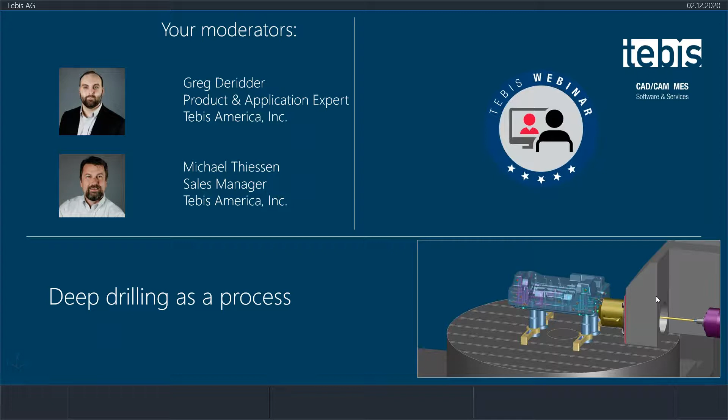A little bit about the history of Tebis. For some of you that know Tebis quite well, you know this history. For some of you that are fairly new with Tebis, this is potentially a new experience. Tebis has been around since 1984, founded by Mr. Bernhard Rindfleisch and Mr. Hahn.

And I'm proud to say that this year marks our 25th year anniversary here in the US. We started in 1996 by Mr. Gerardo Miller here in the United States, and ever since we've been operating out of our Troy location. As you see, all the way through our current state, the last milestone shown is 2018, but trust me, there were many more milestones between 2018 and today.

Just to give you an idea, Tebis is not just a German company based out of our German headquarters with all of its subsidiaries. Tebis is a worldwide company. We deal mainly with our sister companies, our subsidiaries here in the US at Tebis America, as well as our friends at Tebis UK, Tebis Scandinavia, and so forth.

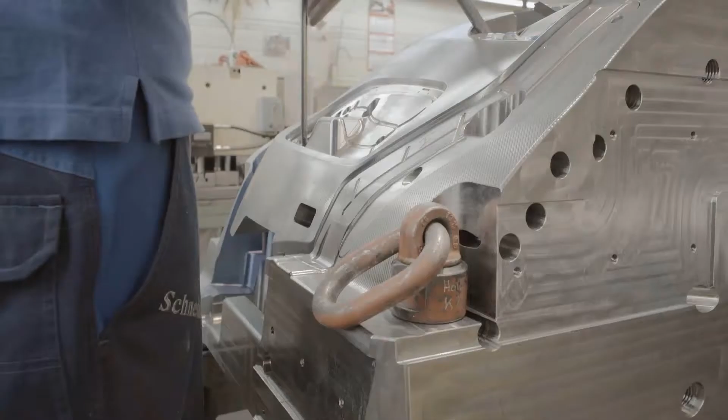The various different sectors that we are in: of course, we're in the mold and die, that's what we're mainly known for, but also in the aerospace industry, in the mold making industry, as I've already said, as well as the medical industry. Just to give you a little bit of an idea of where we're all involved, it is also electrode creation. And in this particular webinar, of course, we're dealing with deep hole drilling or gun drilling applications, which of course is majorly involved in the mold environment, but also in the die environment with hot forming dies and so forth, where you have to put coolant lines inside the molds.

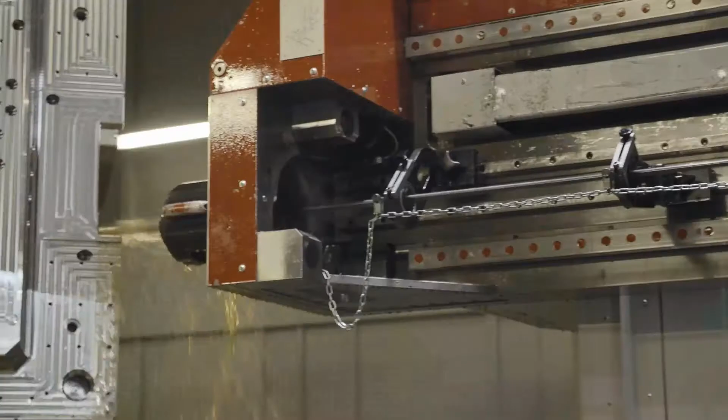So just to give you that, all the Tebis programs that we can create come directly out of our software that we develop inside of our system. And this deep hole drilling is no different than any of the other modules that we have. It is developed in our own house near Munich, Germany.

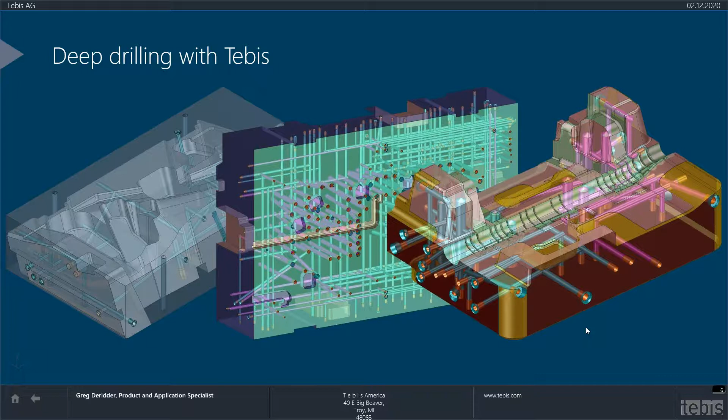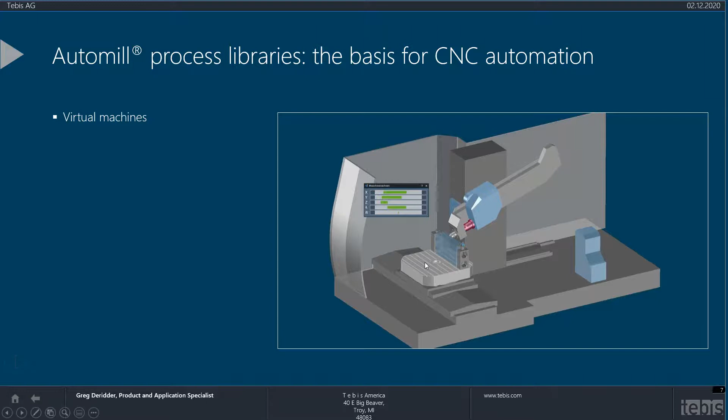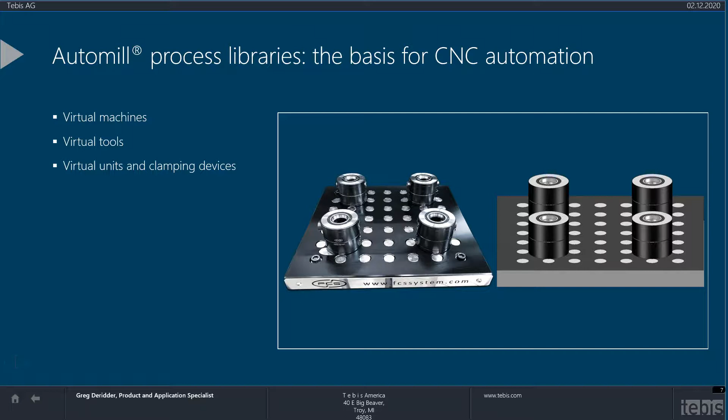All right. So Tebis is going to utilize Automill here to create different items for not only automation, but different standardized processes, such as digital twins, such as virtual machines. We can also implement the virtual tooling here, so we can collision check the full tool, the cutter, the shank and the holder, all the way to the head of the machine, as well as the limits. We also have virtual units, such as clamping devices, FCS, risers. We can draw those in the software, and you're able to fully set up your part very, very easily.

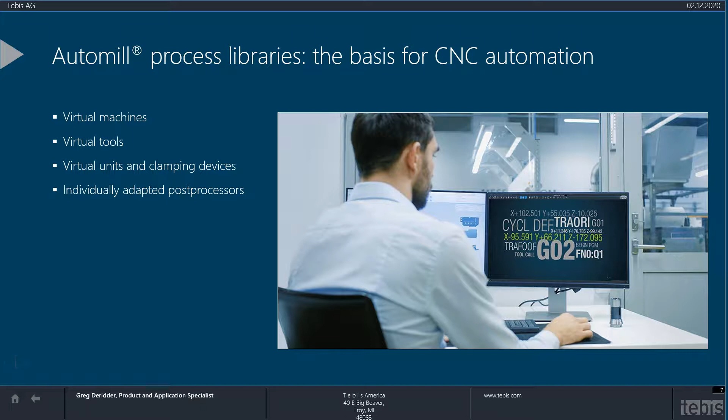We have customized post processors that we're going to create, so we can handle any sort of controller, most controllers that are out there for different styles of machines. So maybe your machine doesn't have a standard controller, but that's no problem here for us.

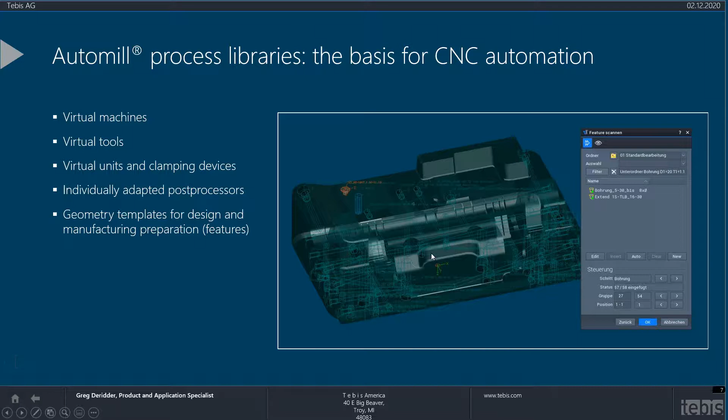We also work off a very templated system. So different items, what we're going to call features here. Features essentially are going to stretch over the part to any sort of water line that might be here, water lines, ejection lines, vent holes, things like that. And we're going to make these variable so they can fit a wide variety of different sizes. And then this is going to hold the smarts, to where if it sees a little hole like this, it's going to see a spot face. It's going to see maybe it needs to put in a spot drill, maybe a drill, maybe if it's longer, it'll put in a gun drill.

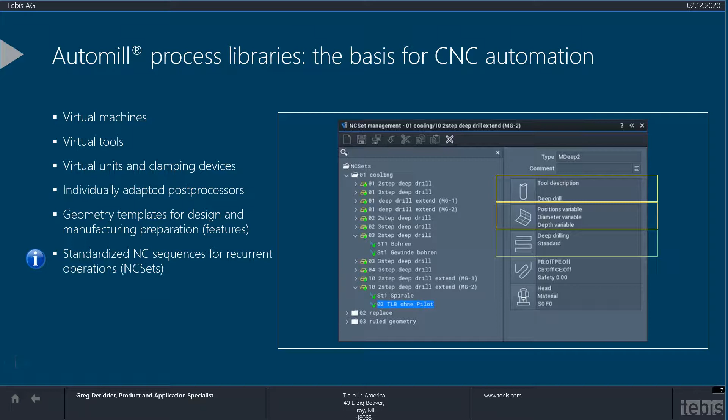We're going to do this with what we call an NC set. What an NC set is going to be is a grouping of tool paths that we create ahead of time that's going to take a look at the feature, and they're going to be connected. So now if I run a feature, it'll actually run an NC set in the background, and this is going to hold a lot of your variables, to where maybe I want to switch over a machine and I want to switch the process a little bit. Maybe the strategy changes, the tooling might change, different holders, things of that nature.

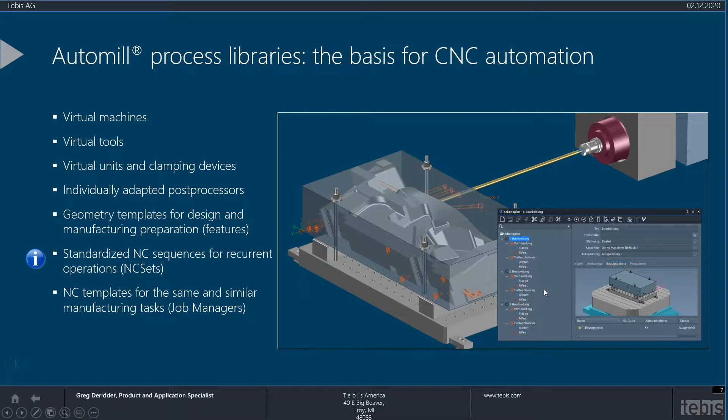And then we have NC templates for similar machining tasks. So essentially what this is saying is I'll bring in a templated file here that's going to allow me to maybe pick a different head. It's going to run a different feature automated program here, or maybe I want to run specific static tools in here. I could even put in there as well, but we're going to focus a little more on the automation side of things. So I want to go back here and discuss one more thing here.

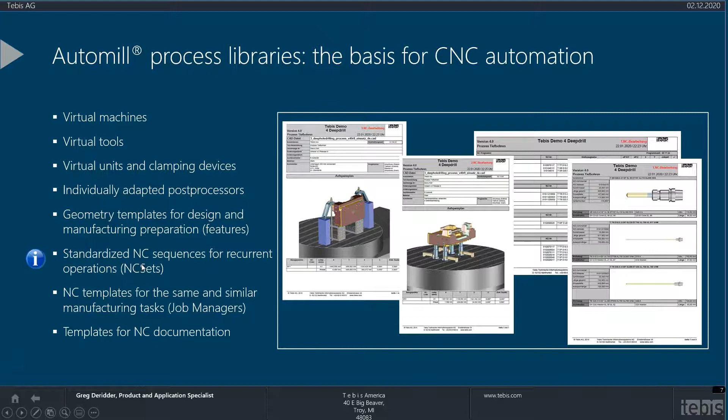So I'm going to go back here. We're going to discuss these NC sets just a little bit further before we really get started. So exactly what is an NC set? As I've said before, it's more of a grouping of tool paths that we create ahead of time that we can use in the future, and then I can keep using them. So the whole point of this is to standardize your process. You don't want to be repeating yourself, programming the same thing over and over again. So if I create these NC sets ahead of time, then I'm able to standardize my process a little more.

We can make as many of these as we need to. But this is what it's going to look like. Right here is a library for it. All right. And the first thing it's going to ask for is for your tooling. So we're looking at a variable tool description. What that's going to do is it's going to search your tool library. It's going to look for the right tool.

Okay. It's going to look for the right size tool as well, which is going to help optimize what I'm using. It's going to make sure that the tool's not too short, but it's also not going to grab the longest guy in the drawer there. It's going to make sure that it optimizes it and grabs something that will fit, but that's also optimal for you to run. It's also going to look at the different entities here.

So talking about the features a little bit, which I'll get more into, this is actually going to stretch across your features here, where you're going to see the different shape, if it's a through hole or if it stops. It's going to look at the diameters, it's going to look at the depths, and I'll get a little further into this depth table too, of how simple this really can be. Basically, you're letting the features do all of the work for you. Once you automate those features in, then you're pretty much there.

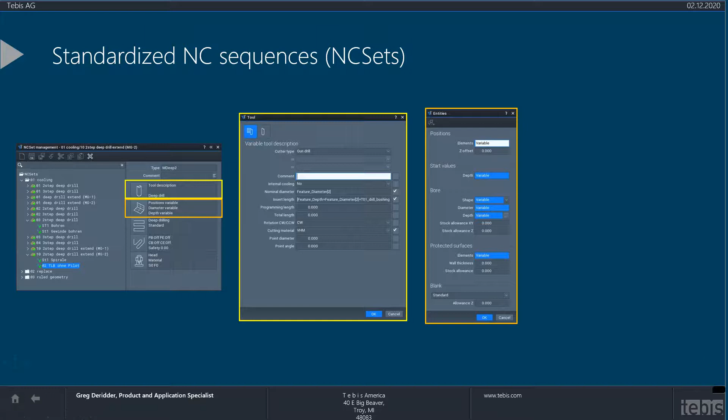It's really, really simple. So if I look at that depth table, it's going to show me the material area, the gap area, things like that. Then I can really easily just kind of go back and switch it if I need to. And then this is going to be your strategy panel, where you can go in and you can really fine tune what you want to do here. Maybe you want to adjust how it starts from the very beginning. Maybe you want to change how it's looking at those cut sections.

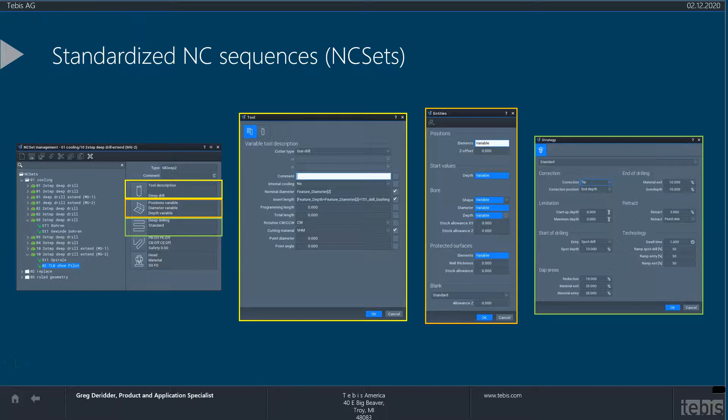So a cut section is more or less going to be a water line for a mold. And that water line is going to be passing through another water line that was already previously drilled. So as it passes through, some of you guys maybe know or you don't know, you need to speed up and slow down that drill, right? A certain amount. Maybe you want to put a ramp in there, ramp the speeds and feeds down, or maybe you just want to ramp the feed down. It really just depends, but we can really fine tune that here, which is really nice.

All right, so let's just talk about some of the configuration settings that we have here and how easy it is to use, right? This is, like I said, more of a set it and forget it. You're creating something in the beginning to use till the end of time, right?

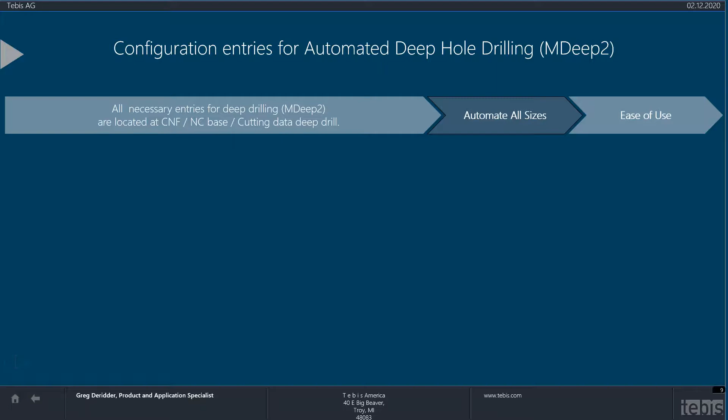You're creating something that is, okay, this machine maybe is set up a certain way, but I don't really want to run it this way on this other machine, so I'm going to set up a different configuration setting. So just to kind of look here, we got our configuration. This was actually added recently with our latest update for gun drilling water lines and such inside of Tebis. But you're able to really fine tune everything in here.

So you can have different machine setups for different operations, different materials, and you can get very exact, which is something that we were looking to do here. So if you want to, you could say, I have this gun drill. It's maybe an inserted tip, or this one's a conventional style gun drill. I want to run it, let's say, 2,000 at 6 inches a minute. But then when I slow down, I want to slow the speed and feed down, maybe to 1,000 spindle speed, and then maybe like 2 inches a minute.

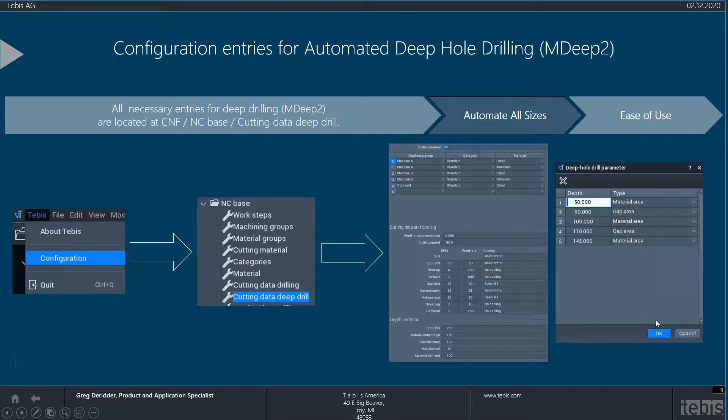And you could do that for that gun drill, but then you could also insert another value for another one. And then this is that depth table I was talking a little bit about, where it'll give you the exact depths based on those feature cut sections, which I'll get into. It'll say, at 50 millimeters deep, that's all material, but at 60 millimeters deep, there's a gap there. But really, you could just go through and switch it back and forth. So even if there's not really a line there and I don't want it to slow down, you can just switch it. It's really, really easy.

All right, so just a little bit of a tip and trick section here. With my experience working with these different style machines, we worked with IMSA, Taurus gun drills, we worked with Jetto gun drills, things like that. And for the categories of work steps, it all really kind of comes down to the same bona fide items here. And the first thing I'm going to talk about is a work step. What is it really? You see two of them here that I created: deep hole drilling and preparation.

This is more or less if you have gun drills and boring mills inside of the same shop, and maybe you want to run a gun drill a little bit differently on a gun drill than a boring mill. So on a boring mill, you could set everything up in one automated process and kind of standardize everything. And you can run a preparation set, which maybe will only run your 2D, and then you can run a deep hole drilling set, and that's only going to run your gun drills. So like I said, just a little bit of a tip and trick here if this is something you're interested in.

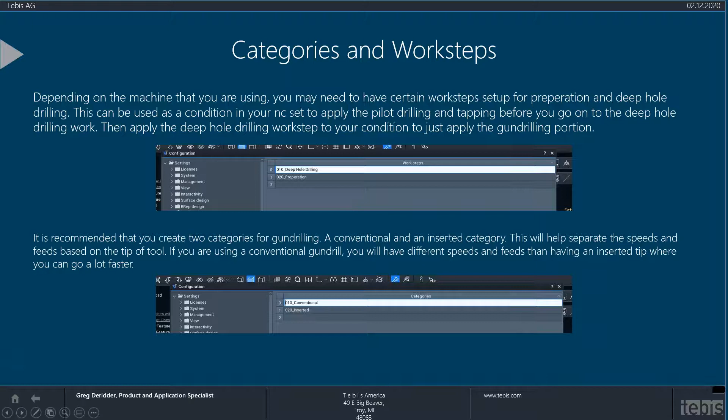And then this right here is going to be the categories that I would typically recommend. Most of the time, if I'm going to a shop, I'm going to see guys using both styles of gun drills. Some guys are going to use inserted gun drills. Some guys are going to use conventional. So typically, I'll make a category for each, for conventional style and inserted. This is just going to help separate my speeds and feeds very nicely and make everything a little bit easier to use.

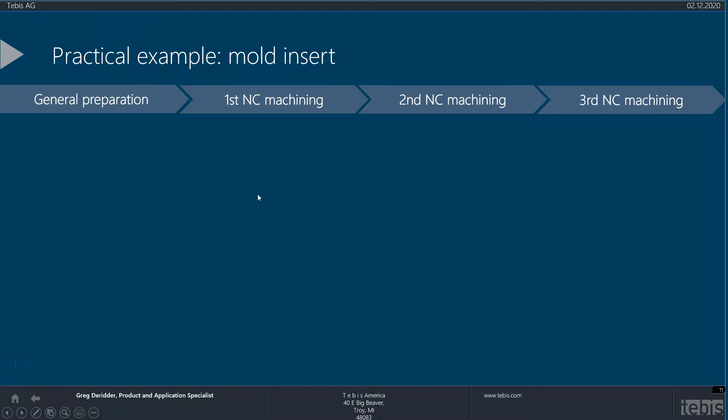All right, so now we're going to start talking more of a practical example here. So you got a couple items like your general preparation, your first NC machining, second NC machining, third NC machining. So it's just really the process. So what's the first step? I open up a job, it's been designed, it gets sent to me. What's step number one? Step number one is going to be the generation of features. I need to create all the features.

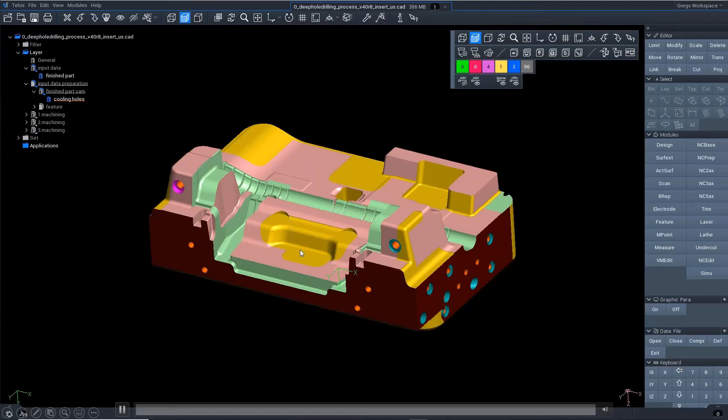So for some of you that haven't really worked with a feature before, really that's just going to be an overlay of the water lines. For right now, we'll just talk about the water lines, but it's an overlay of the water lines that are there. So it's going to have all the parametrics there. It's going to point to all the correct tool paths. It's going to pull all the necessary data that I need. So let's see it here. And as you can see here, this is just going to be this mold insert that I'm going to be working with.

And first thing I need to do is do a little bit of prep work. So I'll actually show you how to do this really quickly. You can use a top remove function, which is our function to actually separate the topology a little bit. Very, very useful. And for right now, I'm just going to go based off of the colors.

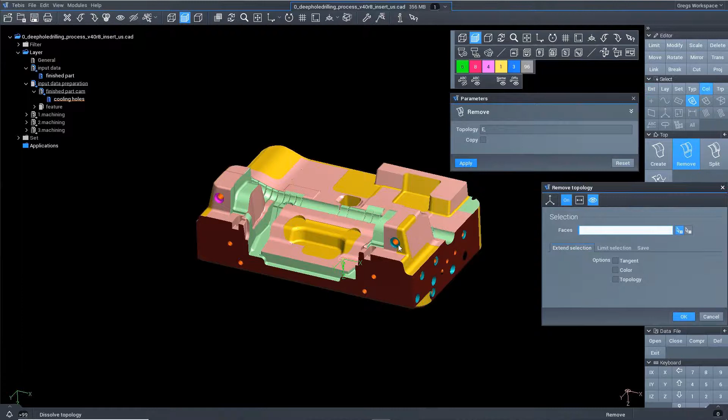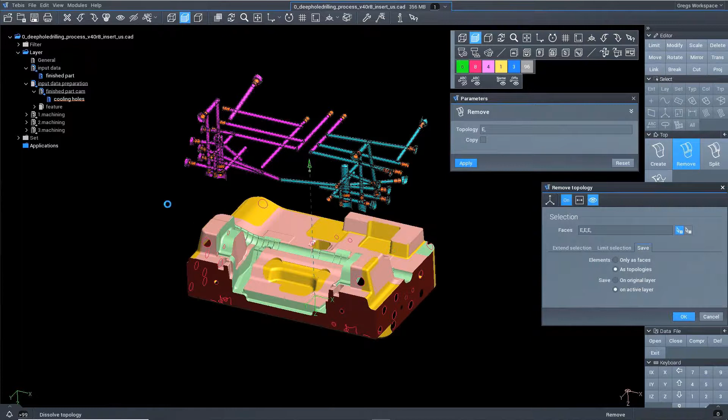If you're not using colors, there are other items that you can use, like tangencies and whatnot. But I'm just going to pick the colors here. And then I can actually separate very easily the water lines from the part itself. Not something that you necessarily have to do, but very highly suggested, because now it's going to make the whole process much easier, and you're not looking at the whole block wondering if you got everything or not. So just to help simplify it a little bit.

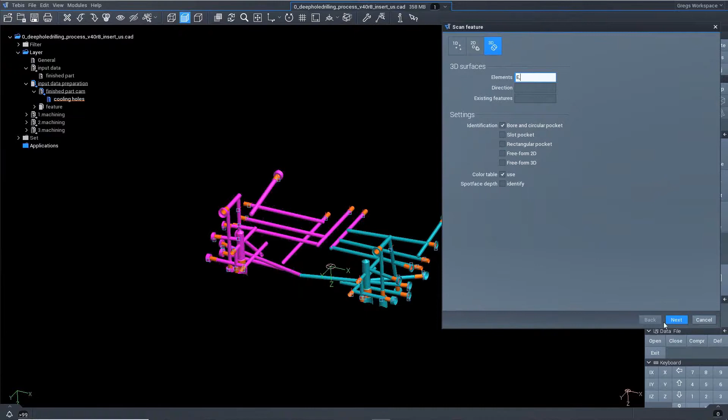We have another option here for extending. So typically what this is, which I find to be really cool personally, I wish I would have had this back when I was programming for the Gundrills. But what it is essentially, if your block is a little bit bigger than the part itself, maybe you went and you picked up a raw block and you need to put some spot faces on there so that Gundrill seats off properly. We can make this really simple.

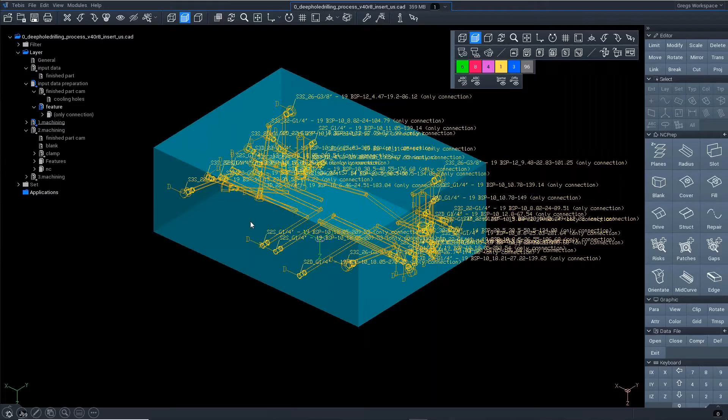So essentially, if you take a look here, the stock model is actually a little bit bigger than these features. It's a little bit longer. So obviously the starting point of the feature would be here, so you can't run it down into the block, right? You'll crash it. So I'll pick the stock model and then I'll actually scan all the features.

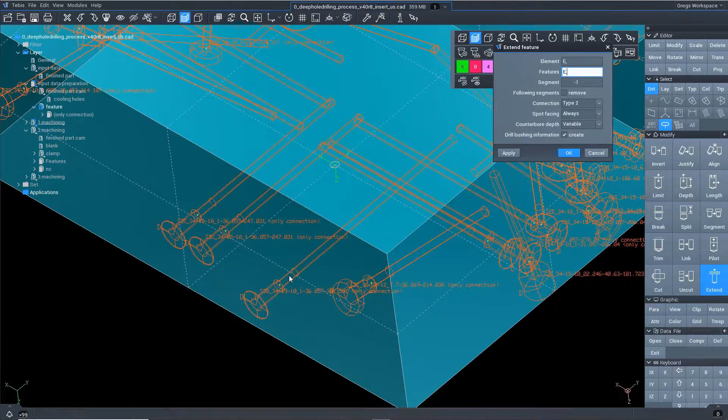And you can set up different types. But as you can see, it's going to automatically pull those features right out to the edge of the block here and then insert a spot face as necessary. It'll also insert a little counter bore too, which is kind of cool. If you got like a tap extension or something, that way it fits nicely in there.

All right, so now I made sure I got all the right features. Maybe, like I said, I have a raw block, or maybe I do have a finished block and I don't need to worry about that. It just really depends. So the next step is going to be, how do I want to sort this? I really do think organization is key, guys. You start working with a very complicated block. If you don't organize it in the beginning, it could always be a little bit of a nuisance here.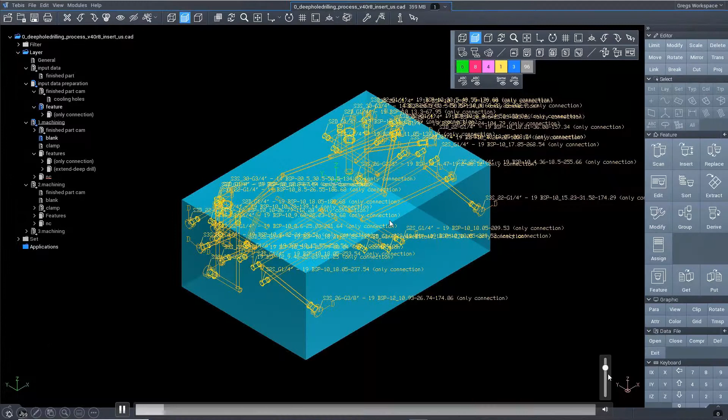So if I take a look, Tebis has a great sorting option, right? And I could put it on a certain layer, and it'll automatically sort everything per direction. So I can see what's coming from the top of block, what's coming from the side of block. Maybe I want to be a little more specific. Really simple. All right, so I created a feature. Maybe I got a raw block or something. I need to add a couple spot faces. I can do that really easily here and then sort it up. So really, this process is super quick.

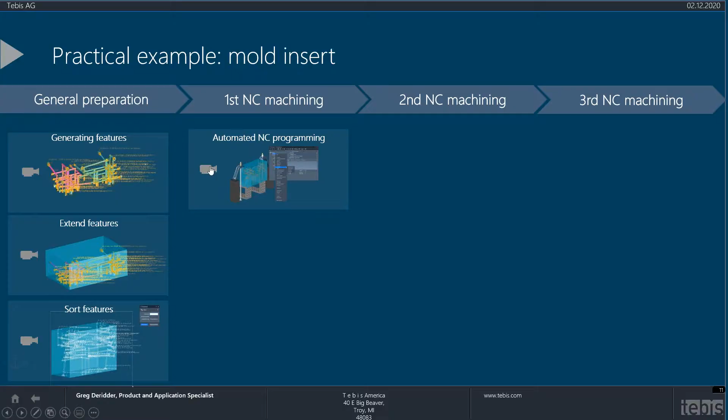So the next step is going to be to program it, right? Maybe I want to run like a template, maybe just for the backup block. This is going to be if you're not utilizing our cut and group section. So if I click this, you can see that I'm just going to quickly import a TXF file here.

Some of you maybe have been using templates for a little while now, so you might understand this, but realistically, what I'm trying to do is just standardize the process. I don't want to have something programmed manually every single time. I don't want to repeat myself.

So I'm going to go back in. I'm going to make sure I've got the correct pickup on the block here. Once I got the correct pickup, it already has all the toolpaths in there. And then I'm just going to kick this off. So once I kick it off, it's going to run everything that's needed. Maybe it'll skip some things that it doesn't need to, which is also kind of nice.

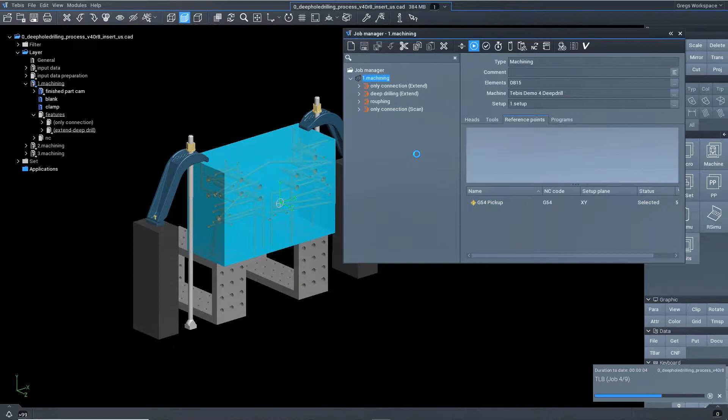Maybe it doesn't need to do everything, but my goal here is really just to maybe do a little bit of machining. Like as you can see here, it'll do a little bit of maybe rough on the back of the block if it needs to. And then it'll go through and it'll gun drill the water line. So you can see right here, this is going to drill everything as necessary.

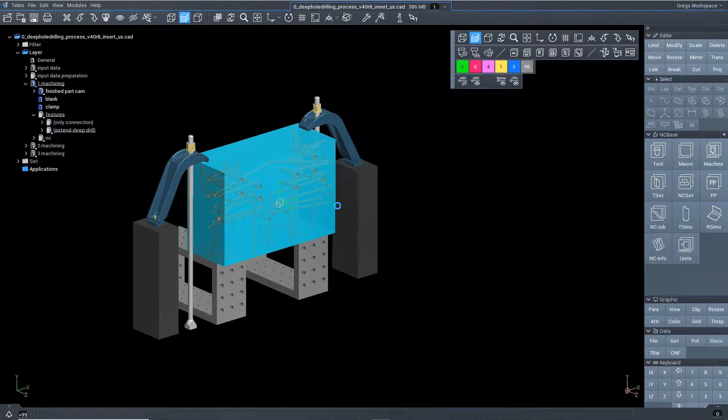So within no time at all, I was able to go through, create features, extend them, do what I need to do, and then I could create toolpaths. I could kick the machine off pretty quickly, and I didn't really have to look at any tooling. I didn't have to go through and adjust any parameters. All that stuff is set based off our feature and NC set system.

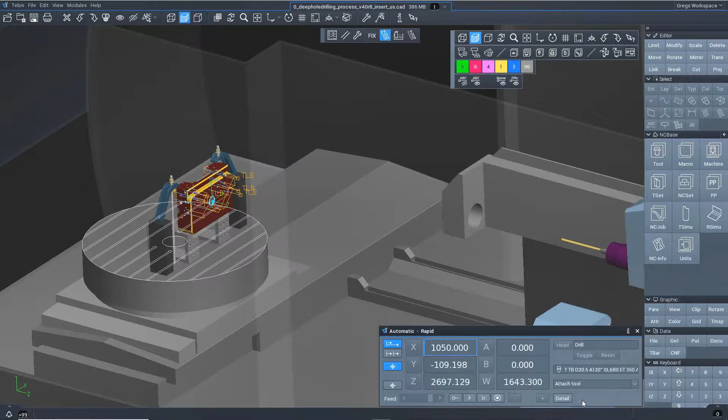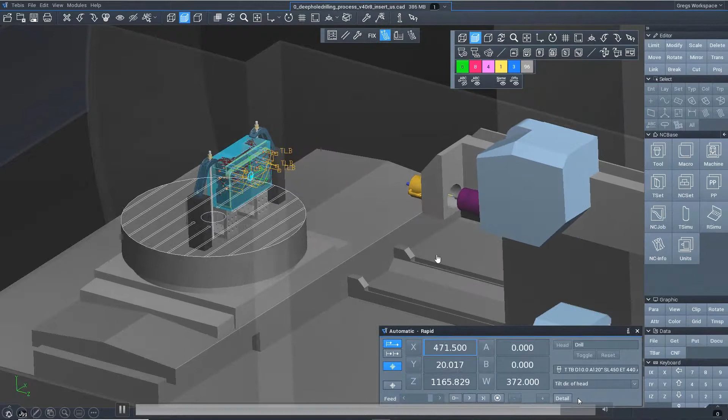So you can see here, it's automatically going to load the correct bushing. It's going to load the gun drills, and then I'm going to drill everything that's needed here. We kind of skip through this a little bit. You can actually see if it has to, too. This is just the straight work, but then maybe it goes through and does a little bit of a tilt. So this gun drill just has one head, right?

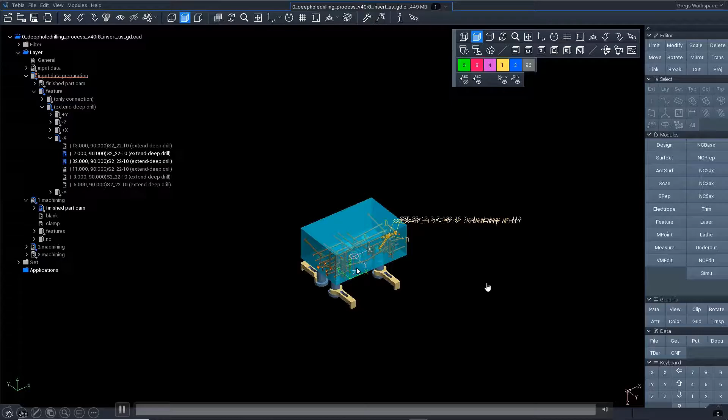All right, so what happens if you get a block and you're really not sure what bushing to use, or maybe you just want to test a couple things out here. We have this option here for planning. So if you look here, this is an angled spot face. Maybe I just want to get an idea of what I'm doing, what I'm using.

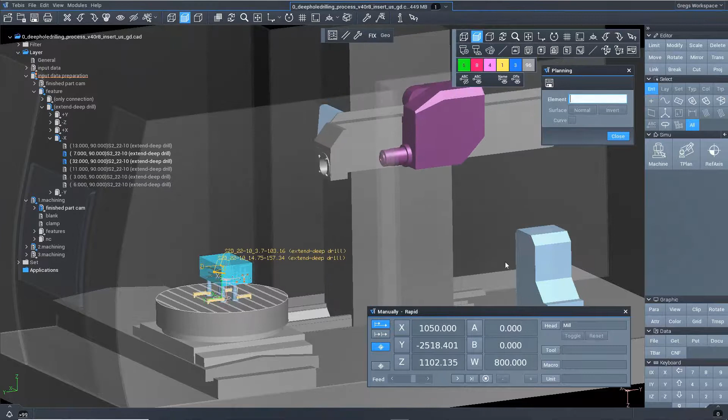Maybe I got a couple different bushings. I know some shops will have a whole drawer, right? Maybe if they go on the lathe, they create different size bushings. Maybe they create different extensions. So that's really what this is for. I'm going to pull in the tool. I got the gun drill head loaded. So just grab sort of a longer tool if I can, something decent.

And then you want to make sure you pick what's called a unit. The unit is going to be all your different bushings. This is something that you can add to the virtual machine. So I'll just pick a short guy here to start. And then you can adjust everything else as necessary. So you can see I could draw the drill back. I can move it around as needed. I can get some good numbers right away.

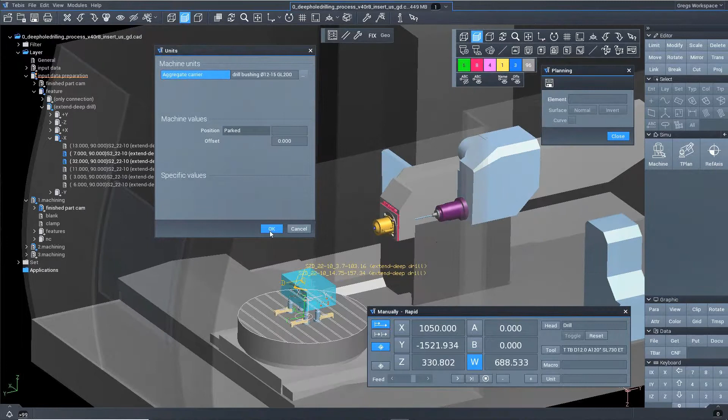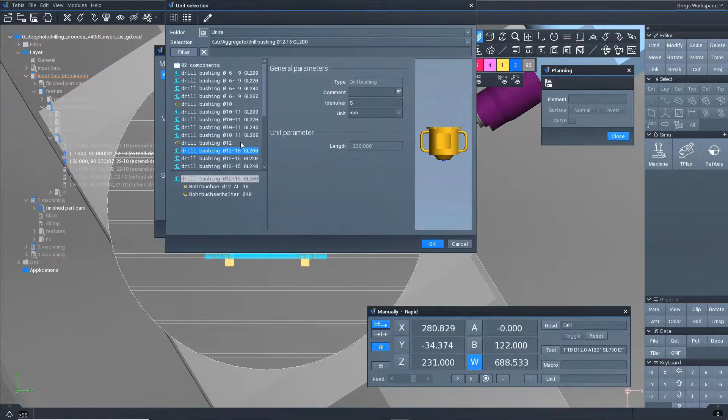And then what's pretty cool about this is now that I'm utilizing our feature technology, I can actually pick that feature right away and it'll jump to it. So as you can see, if I jump to that, my bushing's going to crash, right? So that one's no good. I can't use that. So I can go back to my units, and then I can readjust. And I could pick a little bit of a longer bushing here.

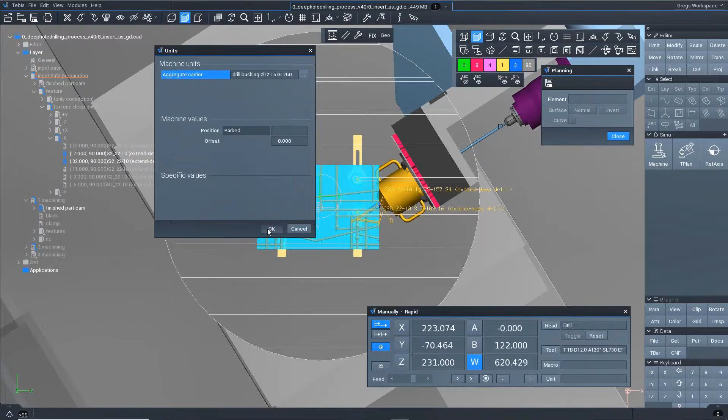You can actually draw the gun drill back into the block a little bit too, just if you want to see if it's going to air out on your length, possibly with that longer bushing, which is really nice. Just reselect your feature, and then you can see I've got the clearance necessary. So now I know for this instance, that's going to be the bushing that I want to use.

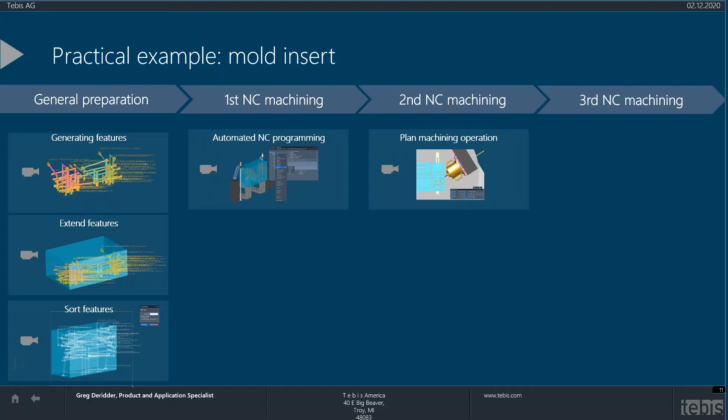All right, so let's get into cutting and grouping the features. So if I'm going to be working with more of a user-based sequence here, which is really nice with Tebis, I can actually sort my features and I can cut them. Some machines don't have this functionality, so we need to do it in the software. And you can figure out what side you want to machine first.

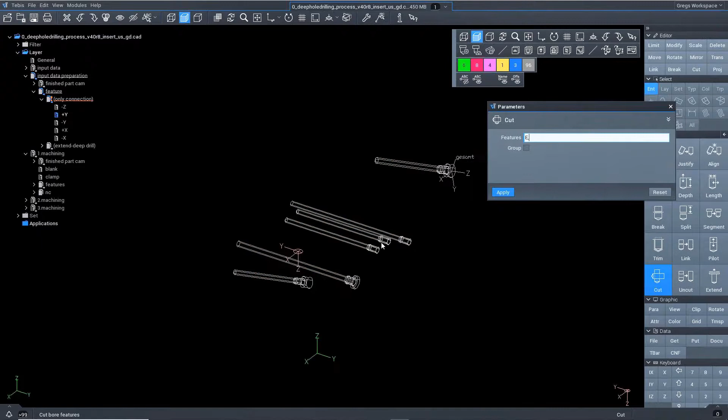I could pick that side of features. Like I say, this will be my second side I want to machine, and this is my third. And as you can see, it's now going to add those cut sections to the feature.

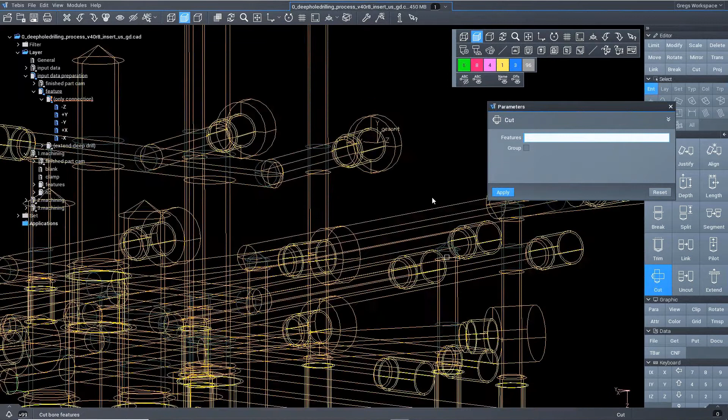So those cut sections in Tebis are going to be called a gap. As you can see right here, that's where the gun drill is going to speed up and slow down. You're giving it a user-based sequence to say, hey, when I cut this side first, this side second, this side third, this side fourth, I want Tebis to know that it's already done. I want to go through, speed up, slow down the gun drill properly, and I don't want anything missed. So at this point, if you'd like to, you could just group everything together.

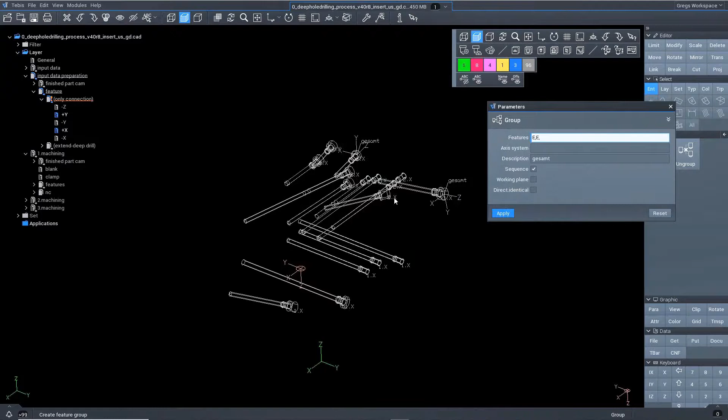Maybe you have a rotary table on your machine, and if you do this, it's just one selection. You just pick it and go, and you just run your program, so it'll run all the cut sections correctly.

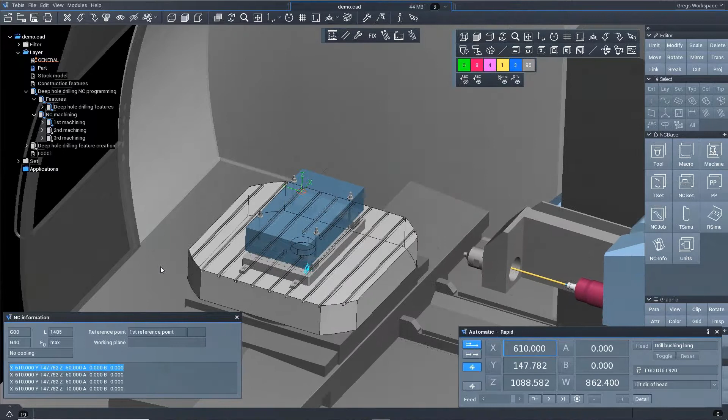What's really nice about this too in Tebis is if you don't like the way this was cut, or you're not happy with it, you could always go back and say uncut, then recut it. What I mean by that is not like cut a job, but more or less create those gap sections again, and maybe eliminate what's there if you want to start over a little bit. But as you can see here, now this is more of an automated process where it's going to go through and machine those features that are there.

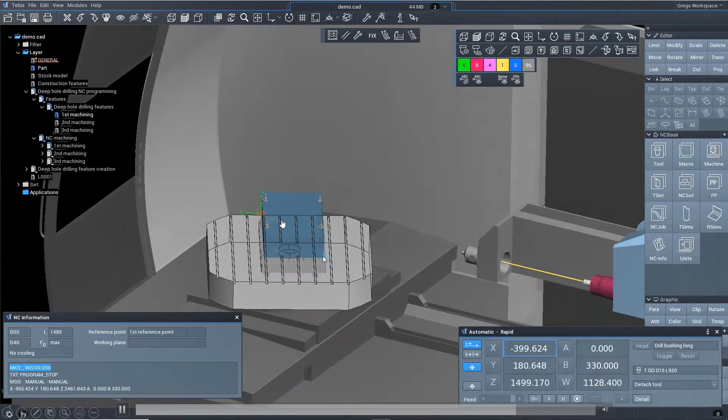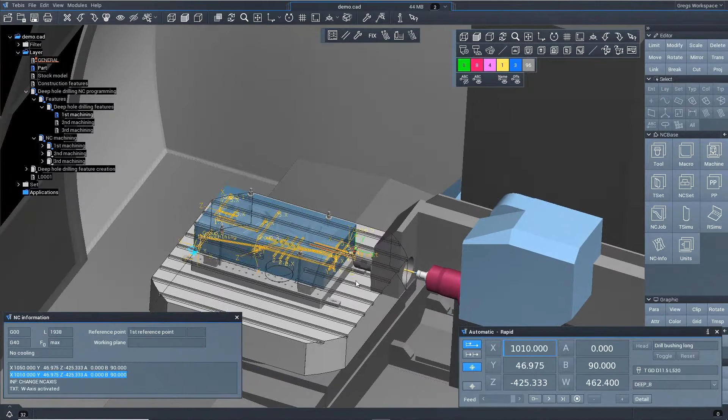You can see it's properly speeding up and slowing down the gun drill as it hits those different cut sections, and because we created our user-based sequence, Tebis already knows. I've got a cut section down here, so it'll speed up and slow down the drill as necessary. Tebis already knows what's been drilled and what is left to go because of that user-based sequence. It's kind of nice that it's a user-based sequence, because maybe sometimes they set up a job on the table and they're not really sure - okay, I set it up with the side facing the machine head, I need to group this a certain way. So now you're able to group those a certain way, make a couple changes if necessary, and go from there.

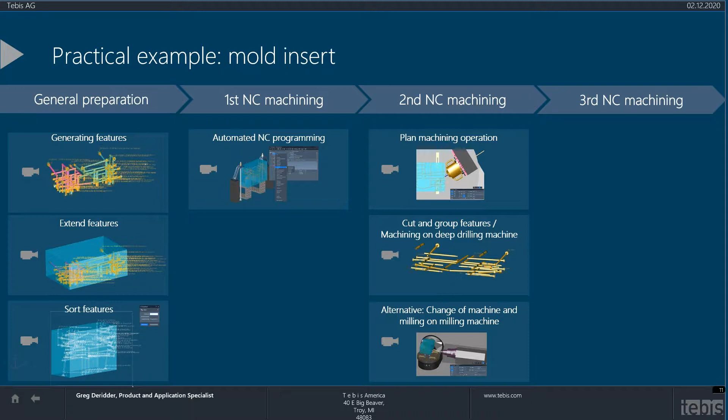All right, so this is going to be if I program on a gun drill, and surprise, it's going to another machine - maybe a boring mill machine - and we need different tooling and such. So if we take a look here, we're going to switch our machine over from a gun drill to more of a Grob style machine. This was already previously programmed here. I'm going to switch it over to a Grob.

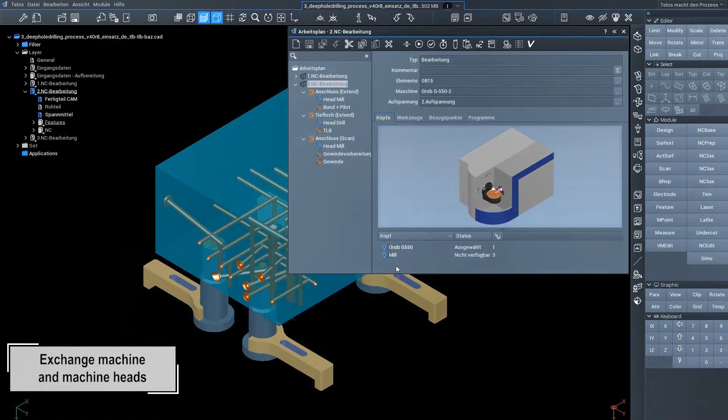All right, I'm going to switch the heads over to a Grob machine. You always want to double check your setup - I highly recommend doing that. You always want to double check your reference as well. And then we'll kick it off.

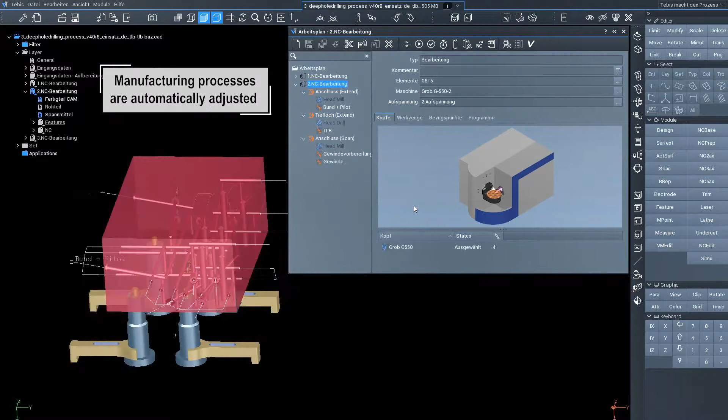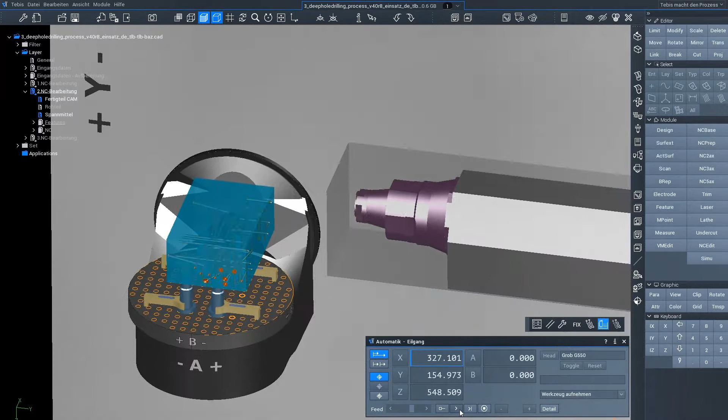So once we kick it off, because of our automation that we set up and the standardization that's here, it's actually going to go through and adjust the process. What I mean by that is because now this is going to more of a boring mill style machine, it's going to add things like a pilot hole. Maybe you need to helix mill a couple items out before you could put a gun drill in there, because you don't necessarily have those whip guides to hold everything in place. So now that I've switched over the machine, we have something called machine groups, and that's going to allow me to change that process very, very easily.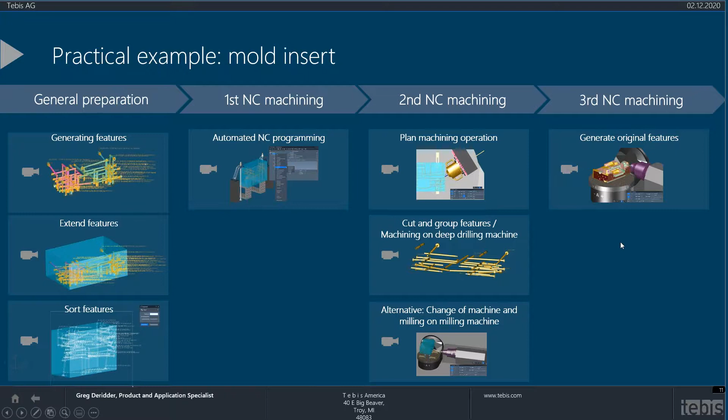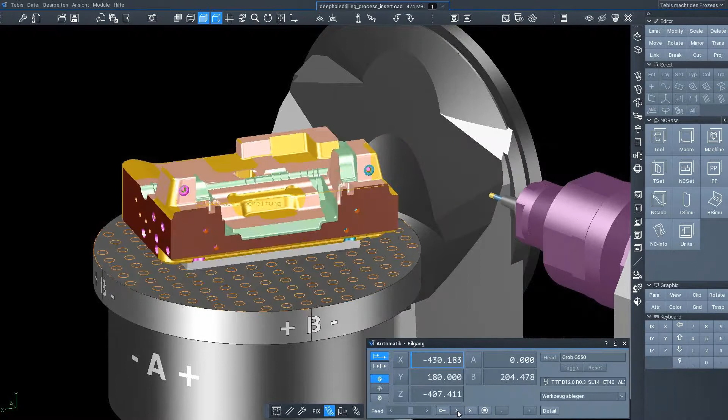So let's go to our next set. Let's talk about generating original features here. Essentially, what we're looking at is maybe I want some 2D - this will be more of the work step area - or maybe on a boring mill machine we need to machine the 2D here first, and then put in a different head or whatnot for the gun drill style machine. So maybe I want to switch up the work step a little bit, just do a little preparation. Then I can go through and update the stock model in case maybe I need to go take a CMM or double check it or whatever it is I need to do here.

The last thing that I'll discuss here in this slide is going to be the multiple head simulation. This is fantastic, absolutely fantastic. I couldn't say anything bad about it at all.

What we're doing here is actually looking for a gun drill that has a gun drill head, and on the side of it, it's going to have a milling head. So the problem that a lot of people have is they want to simulate everything and double check it, making sure, well, what if I have a tap tool in the milling head, how do I go about that?

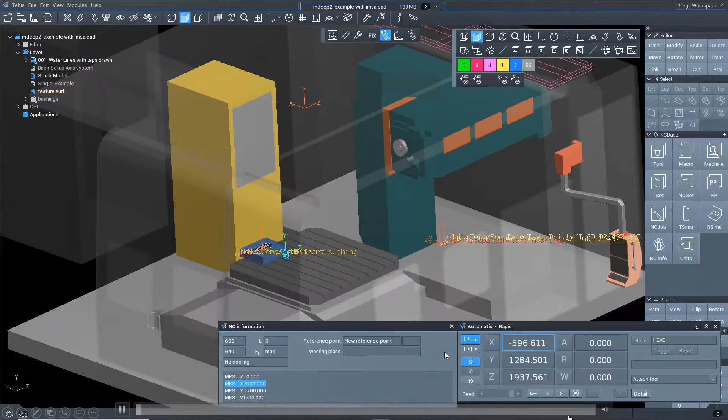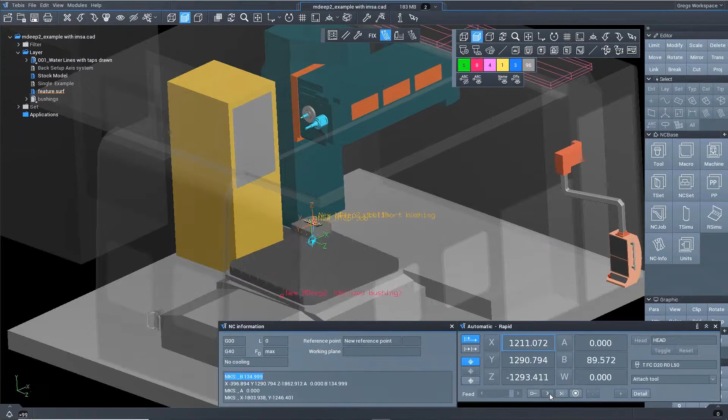So if you take a look here, you can see that I'm fully simulating a dual head gun drill. I'm going to load in a bushing for the gun drill here, and then it's going to switch back over to the milling head, come over and pick up a milling tool from the tool changer. And I now have the bushing and the milling tool running at the same time.

And as it's running, maybe it needs to go back to a gun drill. As you can see, that previous tool that's in that milling head is still in play, so you can collision check against that. You can make sure it's not going to hit the job, not going to hit the table. You're not worried about it.

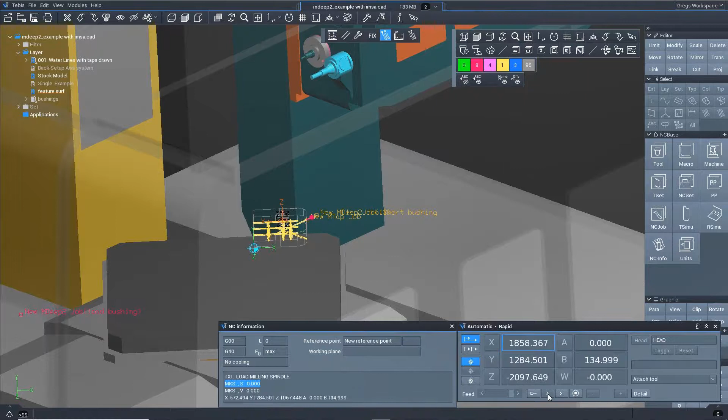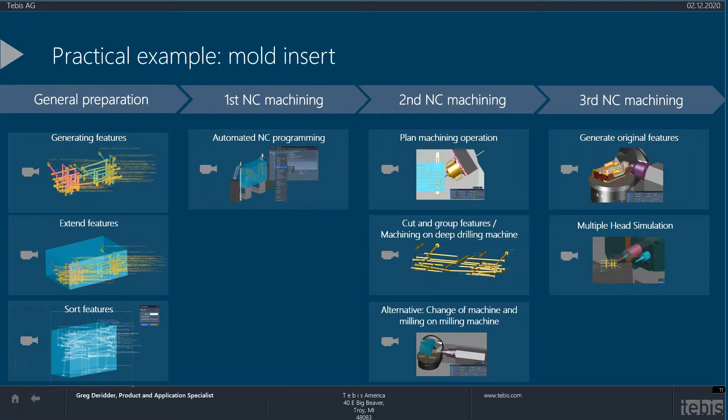This kind of gets more into the talks of a lights out machining style here. And as you can see, as it's running the milling tool, the gun drill bushing is in place, so I'm able to collision check against both of them. Definitely run them, very easy to use. It makes the whole process just a godsend, honestly.

Just to reiterate a couple things, you have your digital twins, your process libraries where you draw everything up, you have your tooling, you have your machine. You're going to have your different units like vices, you could put vices in there, you could do FCS, which is fantastic.

And then you're going to program everything, simulate it, and then the operator or the NC programmer can really easily go in there, look, double check what he's doing, feel confident about it, and then get it to the shop floor so we can get it machining.

So the whole point of this is to make gun drilling a very, very simple process. Put the features in, or scan the block, put the features in. Maybe you want to cut them a certain way off a user-based sequence, and then run them through our job manager, post them out, get them to the floor.

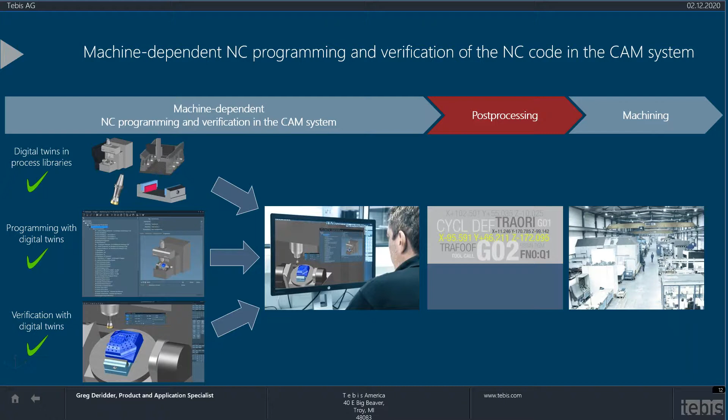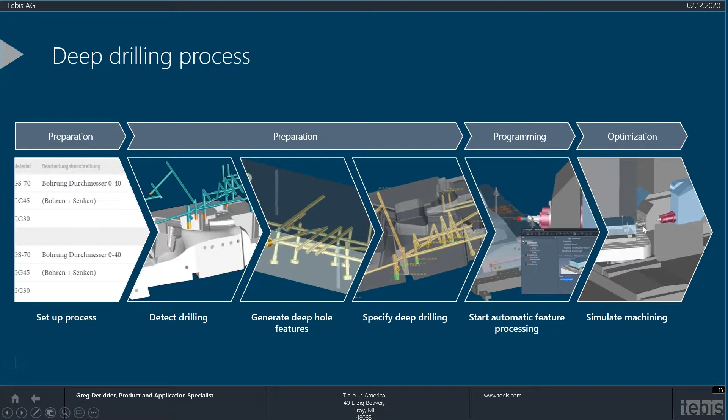All right, so it's essentially what we're talking about here. We just have the whole process: detect it, generate features, specify it, start the automatic processing which is going to be running your job, and then simulate it, check it. The simulation is definitely key in this too, especially if you have a single head gun drill or maybe you have two heads. You want to feel confident for it getting out to the machine.

So at this point, I'll hand it back over to Michael to see if you guys have any questions or you're interested, and we can go from there.